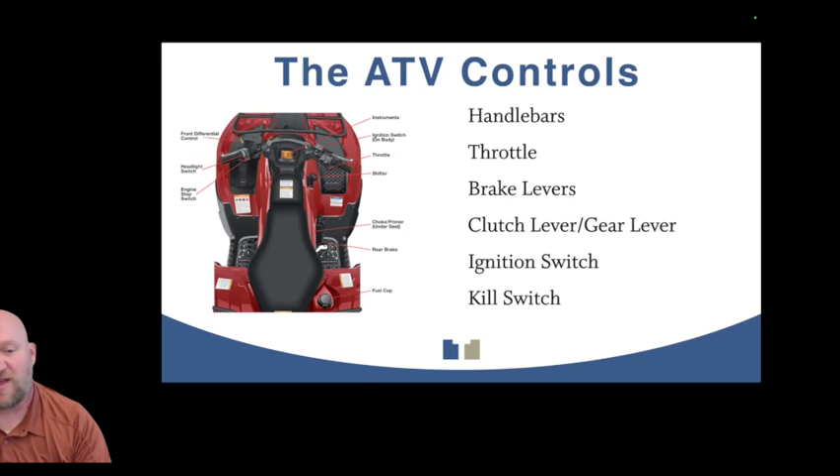Okay, so we're going to talk about handlebars, throttles, brake levers, clutch and gear levers, ignition switch, and what we call the kill switch.

The handlebars is where you steer the ATV. Many of the controls are located here on the handlebars. What's important to know is we always use two hands, two hands at all times on those grips. Don't ever drive with one hand, thinking you can use the other hand to text on your phone or check the weather. We want to make sure we're always using two hands on the handlebars at all times.

Now let's talk about the throttle. It's usually on the right handlebar, that right grip, and it's a thumb-operated mechanism. This is different than a dirt bike or motorcycle, which has a twist handle. Most of our ATVs, if not all, are going to be a thumb-operated throttle on the right-hand handlebar. Now when we're using that throttle, we want to make sure we use smooth, even pressure.

Which means we don't want to feather. What I mean by feather is hitting that throttle multiple times with our thumb, brum, brum, brum, brum, rather than giving it a smooth operation, so that we don't spin the tires or that four-wheeler doesn't jerk on us. We'll talk about why that's important when we discuss the power these ATVs have. But just know we really want to make sure we have smooth operation on that throttle.

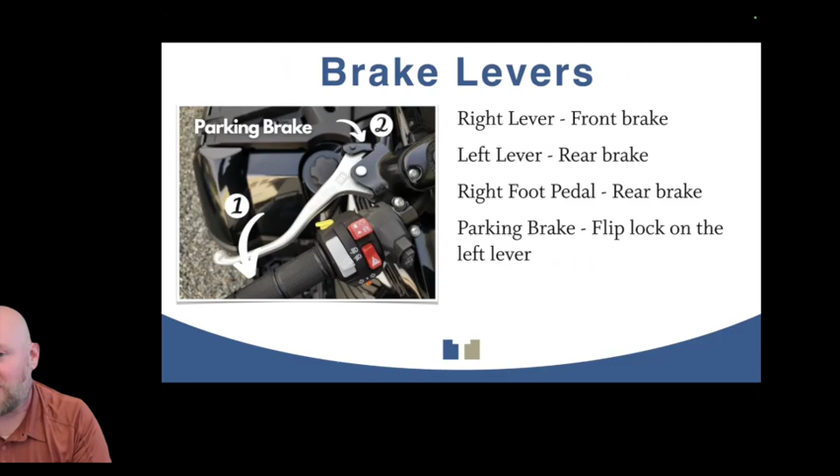Alright, let's keep going here. Let's talk about the clutch and the gear shift. If you have a machine with a manually operated transmission, not an automatic or CVT that automatically shifts gears for you, you've got to do that yourself.

Now, your clutch lever will be located, if you have one, if it's a manual transmission, on the left-hand handlebar. That's where you won't have the left-hand brake because you have the left-hand clutch lever. Now, what the clutch lever does is disengage the wheels from the powertrain and allows you to shift your gears.

When we talk about not popping it, that means when you let that clutch lever out as you shift gears, don't just drop the clutch. Don't just drop that handle, because either you're going to kill the engine, or you're going to pop a wheelie, especially if you're hitting the gas a little at the time. Those rear wheels are going to spin and you're going to pop that front end up. We don't want that to happen because, again, these things are very powerful and will tip over - we'll talk about tip overs in just a few minutes. But it's important to know the clutch lever disengages the wheels. Don't pop that clutch lever.

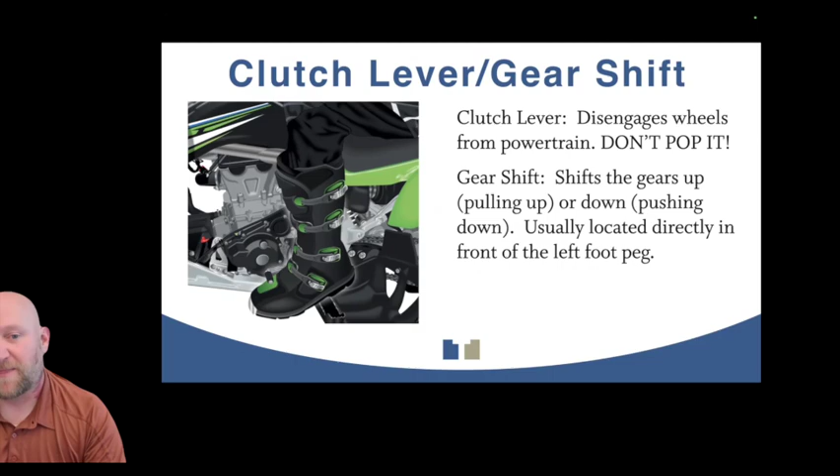The gear shift will be located usually in front of the left foot peg. When you kick the gears up, shift up, you pull up on that gear lever. To kick the gears down, you push down, and that'll shift the transmission into a lower gear. But don't pop that clutch when we're shifting gears.

Now, the ignition and kill switches. The ignition is either a key or a push button that activates the electrical system - we all know this, it turns the thing on. Now, ATVs have a very specific switch, and the function of that switch is to kill the engine, kill the motor, kill all the electrical current going on, and that's what we call the kill switch. It immediately shuts the engine off, and it's usually found on the left handlebar.

Now, you can look here at the picture and see all kinds of different controls. But all of our ATVs - they might not have the reverse override mode switch, a horn, a turn signal, or a winch that goes in and out - but everyone will have a kill switch. If your ATV isn't starting, make sure that the kill switch is disengaged. If you push the kill switch in to kill it for some emergency reason, make sure you pull it out before you try and start the ATV. Otherwise, it ain't going to start.

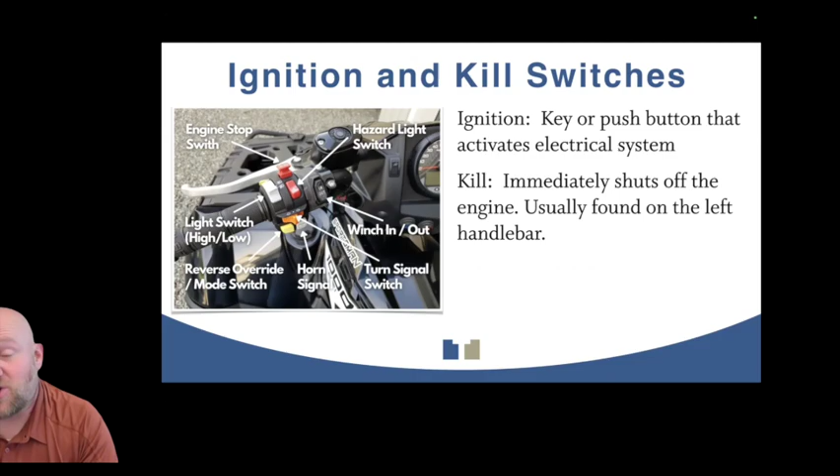So that kill switch is a great function for our ATVs, because what it's going to do is immediately shut something off. So if there's a fire, if there's any kind of damage, if there's an accident, sometimes these engines just won't shut off - hit that kill switch. Make sure you get that engine shut off quickly.

Let's talk about UTV controls. UTVs are more car-like, in the effect that they have a steering wheel, brake pedals, gas pedals. They have a parking brake that's pretty much right there in the center console area where you would find your same parking brake in a vehicle. You just pull it and it sets the parking brake.

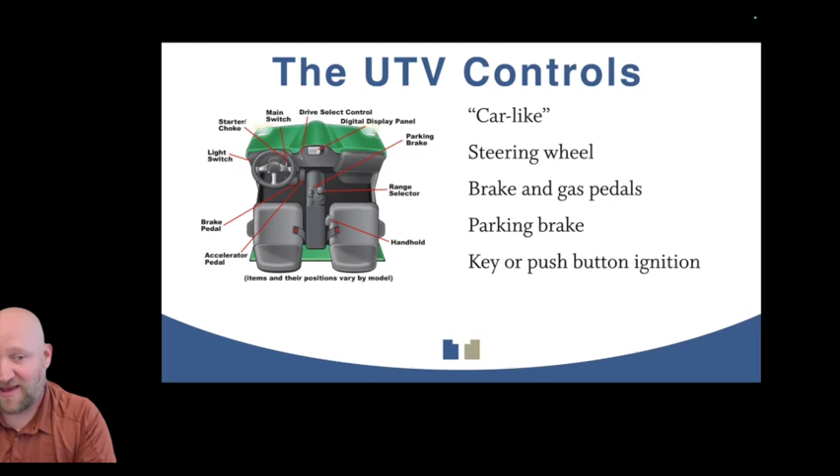Many of these will have a key or a push button type of ignition. There's no kill switch on these. They have a display, a gauge cluster, kind of like you do with your car. They're going to have a gear selector like you do with an automatic transmission in a car. So a UTV is very car-like in its control appearance. Same thing with a golf cart - a golf cart has very car-like characteristics, with a steering wheel, a brake pedal, a gas pedal. The main difference here, though, in a golf cart is that your parking brake is located on your brake pedal.

Now, the parking brake is going to be in the upper left-hand corner of that brake pedal. When you push that brake pedal in, you can then set the parking brake by pushing on that parking brake in the upper left-hand quadrant of your brake pedal. Now, it's important to note, when you push the brakes on a golf cart, don't hit the parking brake when you're just meaning to hit the regular brakes, because that's going to lock the wheels up and cause the golf cart to probably fishtail on you. So make sure we hit the right brake when we're using the golf cart. Golf carts are going to have a key ignition.

Most of the time, they don't have a push button. It's going to be a key that you got to turn on. And then the lever that you're going to use to control the transmission, whether you're going forward or backwards, it's going to probably be located on the seat right below you. One way is forward, one way is reverse. That's another difference between your car and the golf cart.

But again, golf carts, UTVs, they're much more car-like. There's something we're used to, something we do every day. Steering wheel, gas pedal, brake pedal.

ATVs are much different. There's many different controls, thumb operated, hand operated, foot operated, all sorts of different things that we've got to be aware of. ATVs have a unique design, and because of that, we get risk.

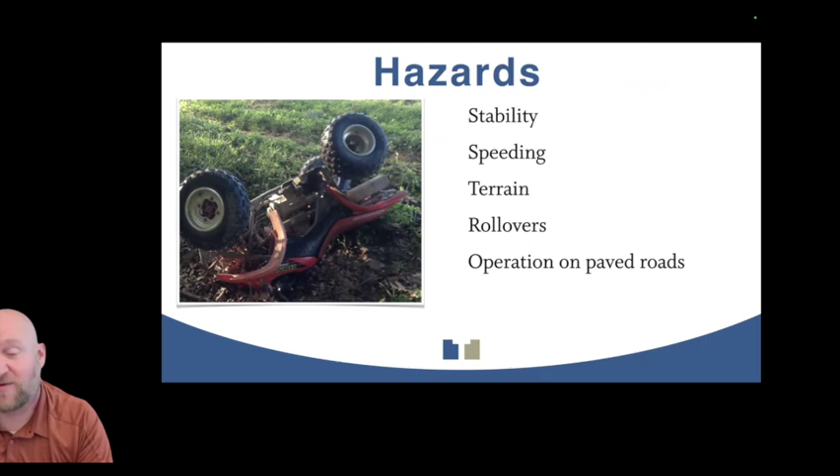So we've got to make sure that we operate those machines very, very carefully because there are many hazards that come with operating ATVs, UTVs, and golf carts. Stability, speeding, terrain, rollovers, and operating any of these pieces of equipment on paved roads. Let's talk about each of these for a minute.

Now, as we look at the terrain, you got to make sure you're aware of the terrain that you're driving on. Many of the times we're taking these ATVs, UTVs, and even sometimes the golf carts on unpaved and unmaintained roads. Things with holes and ruts where we may be crossing trees, stumps, and large rocks that may be invisible because we're driving in a weed field. Fencing and wires that may be downed or along the roadways we've got to be aware of.

Creeks, culverts, and streams. We drive in areas where some of these natural landscapes affect where we're going to be going. So make sure that we are operating our machines in the terrain that we're very familiar with.

Rollovers are the most common type of accident and incident that happen with ATVs, UTVs, and golf carts. They're mostly attributed to altering the center of gravity within that golf cart, UTV or ATV. Now, why do we alter the center of gravity?

It's because we drive too fast. We're driving too fast, and when we try to make a turn, when we're driving too quickly, that center of gravity has shifted from inside the vehicle, inside those four tires. And when we make a sharp turn going too fast, what happens is that center of gravity moves outside of where those four tires are, and that's what causes that rollover accident.

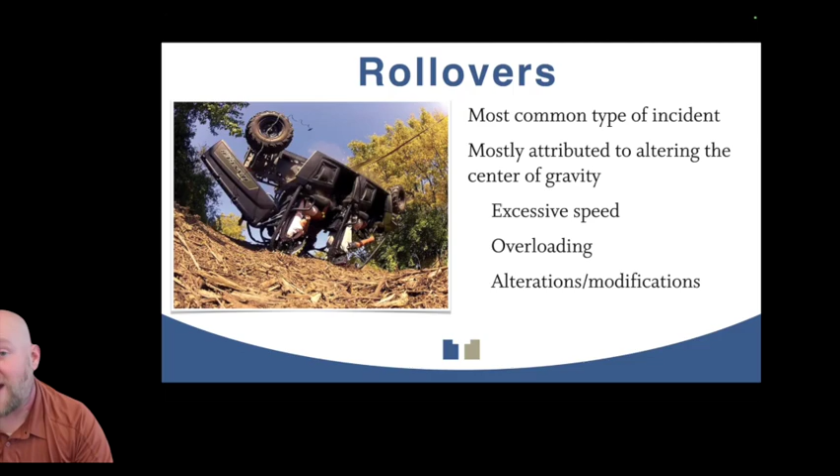A lot of these rollovers are also contributed to because of alterations and modifications that we make to the vehicle, shifting the center of gravity away from where it should be into another area, so the vehicle rolls over very easily.

Now, how do we prevent rollovers? Well, we only want to go up an incline or slope of 15 degrees max. We shouldn't go up an incline more than 15 degrees on any ATV or UTV, because remember, these machines are very powerful with very powerful drivetrains. We hit the gas and it's going to want to keep climbing, even if it's a greater than 15-degree max incline.

Okay, so 15-degree max incline only, 25-degree max side slope. Again, they're powerful, and they balance. If you as the rider can shift your weight to one side and try to balance that out, but a 25-degree max side slope, that's the highest we should go.

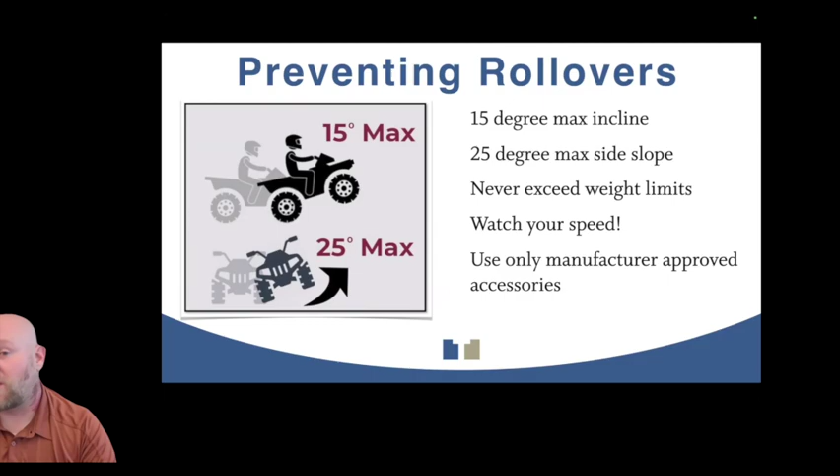Never exceed the weight limits that have been put on there. So we've got to know what the specs are of our ATVs. Using only manufacturer-approved accessories and watching our speed is going to help prevent those rollover accidents from happening.

Now, let's talk about paved roads here for a minute. ATVs and UTVs are specifically designed for off-road use. Now, we see them all the time out on the roads driving, street legal, with turn signals and a horn and things like that. But again, remember, they are specifically designed for off-road use.

We should not be using these vehicles as a daily commuter. We shouldn't be using them inside of our organizations to drive around and go pick up donuts in the morning. Okay, these are really only used for off-road use.

They're more difficult to control on paved roads because they have a lower tire pressure. Their steering is very different, and remember we talked about their suspension being different. They have a fixed rear axle, which makes it difficult to control on a paved road.

When we're crossing a paved road, always cross it at the most direct route. Don't drive on the road for a while and then cross. Cross that paved road as quickly as possible and get back on the off-road where those tires and the suspension can actually help and do work for you.

Golf cart injuries, we see a lot of these, unfortunately. They're due to rollovers and getting in and out of the cart while it's moving. We see so many of these - the driver losing control of that golf cart and something happening. And because these things are very flimsy and squirrely, we see ejections, people getting ejected out of the golf cart.

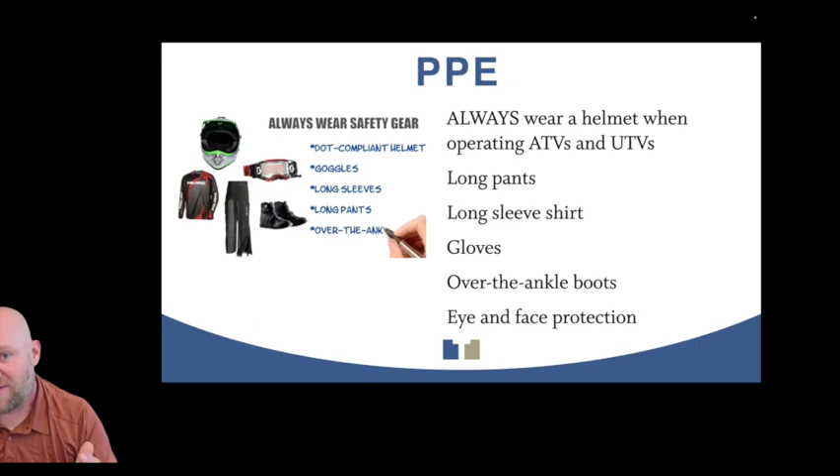No shorts, no short sleeve shirts. I know it's hot, I get it. But if we're going to operate these pieces of machinery, we need to protect our bodies with the proper PPE. Helmets are required for ATV and UTV use. We should require them as an organization. If you're going to drive the ATV, you're going to drive the UTV, you're wearing a helmet.

Those helmets are DOT, Department of Transportation approved. They'll have a decal on them that says that. They can be full face or open face as long as they're approved. They should fit snugly and fasten securely. And you should probably replace these things every 3 to 5 years, or after they've had any damage to them.

Some general safety tips now. Always wear your helmet. Wear your protective gear, your PPEs. Avoid riding on the pavement. Practice and get comfortable with your ATV, UTV, and golf carts. Watch your speed. And this last one: age of 18 and over only can operate ATVs, UTVs, and golf carts in the state of Utah.

And if they're under the age of 18, we can't operate ATVs, UTVs, golf carts. That's in our federal labor, in our child labor laws. Jason's done a fantastic webinar on that. Go to the 23-minute mark of that webinar, and you'll find Jason talking all about these child labor laws on why 18 and over only on our ATVs, UTVs, and golf carts.

All right, any questions out there? I know it's a lot of information. Hopefully it got some good stuff out there.